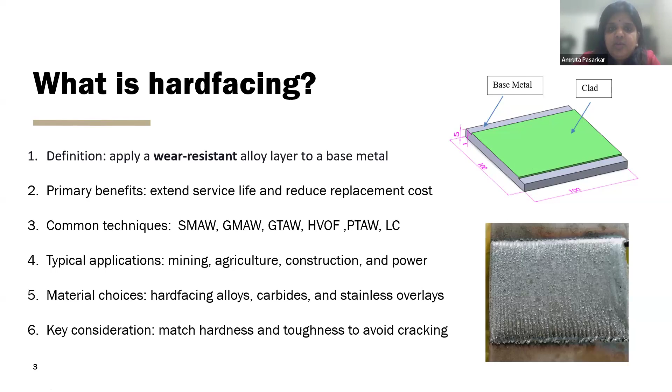Next, the material is selected according to the hardness, what hardness is required according to the application, and the toughness, what kind of toughness is required to avoid cracking, because this particular cladding material is very hard as compared to the base metal. So there should not be any cracking during the hard facing or during its operation.

The need for hard facing. It avoids wear and corrosion on the base metal, it increases the surface hardness, it prevents material degradation in high friction and corrosive environments, and obviously this will extend the component's service life.

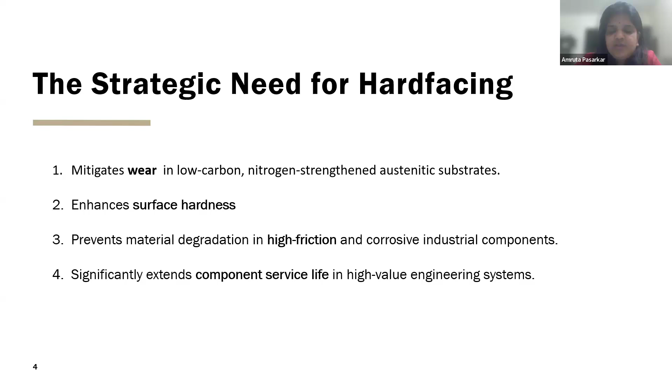Now, more about the 316LN stainless steel base metal, which is being discussed in this presentation. 316LN stainless steel is basically low carbon. L is for low carbon and N is for nitrogen enhanced. So it has some amount of nitrogen and low carbon. Low carbon is below 0.03%, and that prevents sensitization. The enhancement of nitrogen gives more yield strength compared to the standard 316L grades.

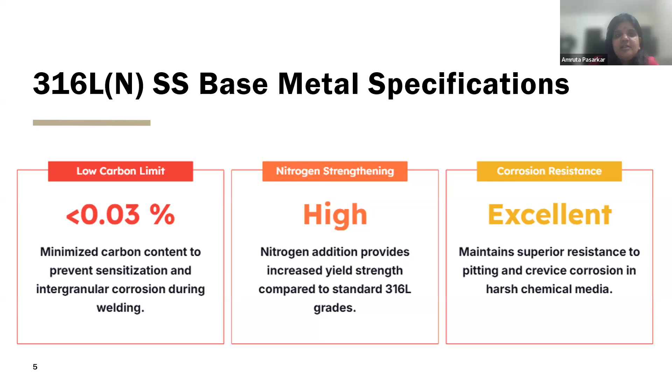And this particular material has excellent resistance to corrosion and excellent resistance to pitting. So this material is used in environments which have very aggressive temperatures or aggressive conditions, because it has a very high hardness and a very high tensile strength, so it can maintain its hardness at elevated temperatures also.

Now, how is the cladding done on the base metal? How do we select what material needs to be used for the cladding? First is the coefficient of thermal expansion. What is the coefficient of thermal expansion of the cladding and the base metal?

That needs to be checked, because if there is a lot of difference between the thermal expansion coefficients of the cladding and the base metal, it will cause stresses at the interface of the cladding and the base metal, and it will lead to cracking. So matching the coefficient of thermal expansion of both materials is very important to reduce the stresses at the interface.

Then the metallurgical bond. There should be a very good metallurgical bond between the powder and the base metal. Because if there is no fusion between the two, it is obviously going to crack or break. Then the wear resistance. Selection is based on the specific abrasion and galling mechanism in the application.

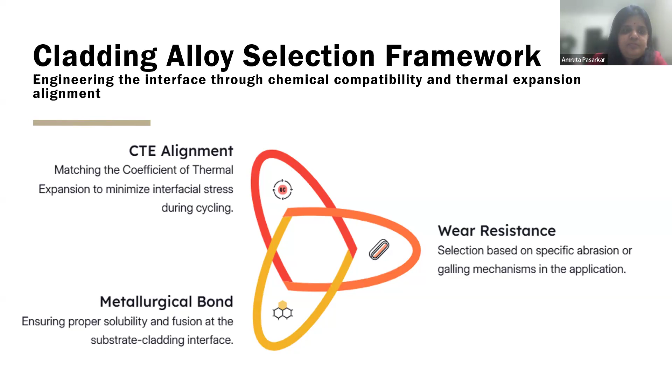There are many types of alloys that can be used, but mostly cobalt-based alloys and nickel-based alloys are used as the cladding material. Cobalt-based alloys such as Stellite 6 and Stellite 21 can be used. I am talking specifically about 316LN stainless steel base metal. If the base metal is something different, the coating can be done with other materials also.

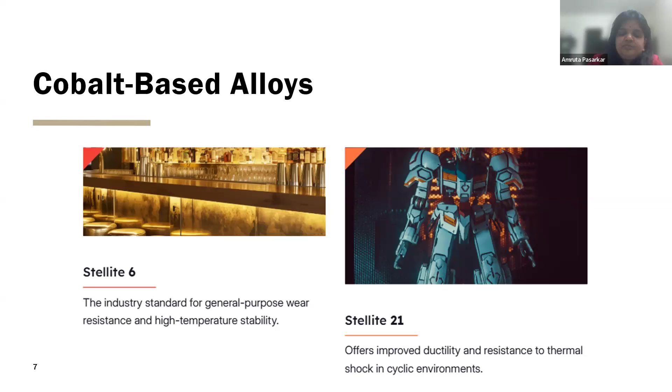So this is about the cobalt-based alloys. There are two alloys that can be used, Stellite 6 and Stellite 21. These are used for general purpose wear resistance and high temperature stability. This also improves ductility and resistance to thermal shock in cyclic environments.

Now, nickel-based alloys. Basically, cobalt-based alloys are prone to radiation. So nickel-based alloys are used as they are radiation stable, and they avoid cobalt-induced radiation activation in nuclear plants. Also, nickel-based alloys have very high hardness, and they can maintain it at elevated temperatures, as in nuclear reactors, around 500 to 700 degrees Celsius.

So we can use nickel-based alloys for superior oxidation and corrosion resistance also. Basically, nickel-based alloys are used wherever there are very high temperatures, as they can maintain their high hardness at elevated temperatures.

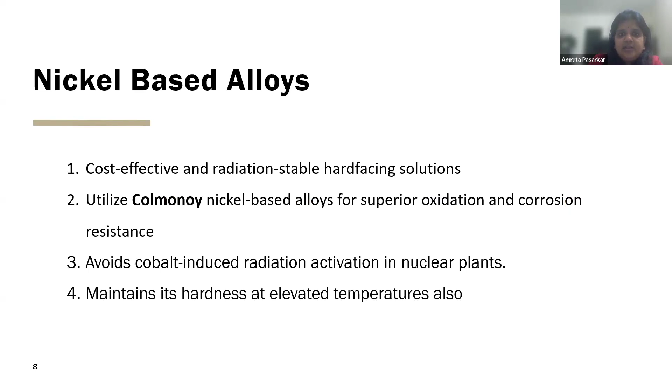Hard-facing deposition cycle. Now, how is this hard-facing basically done? So first is the surface preparation, like the cleaning and degreasing of the 316LN substrate, to make sure that there are no contaminants or debris and the surface is very clean. And then the preheating of that particular base metal is done, and after the preheating, the clad deposition is done by the various methods. So any method can be used as per the requirement and as per the application of the industry.

So applying the material with either laser cladding or plasma transferred arc welding or gas tungsten arc welding, and the parameters of these particular processes need to be decided so that the proper hard facing can be done on the base metal. Now, after the cladding is done, the controlled cooling of the particular component is done. And after the cooling is done, the component, or the cladding layer, is machined to get a plain and normal surface.

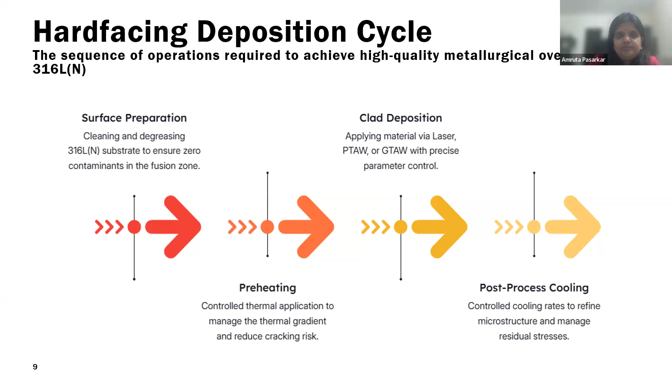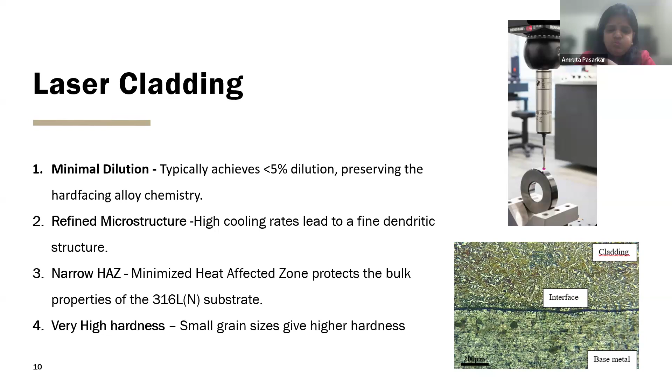Next are the different arc welding processes, that is the plasma transferred arc welding and gas tungsten arc welding. So these are the two major arc welding processes. Now, plasma transferred arc welding gives better dilution control as compared to the gas tungsten arc welding. I will also be discussing the comparison of these processes later on. I'm just discussing the brief points about these processes. Then is the gas tungsten arc welding, which has a lower equipment cost, and it can be used for manual surfacing also.

Now here we can see the image of the gas tungsten arc welding. So here we can see the thickness of this particular interface is a little higher as compared to the laser cladding. But the gas tungsten arc welding process is easier as compared to the other processes, and the equipment cost is also lower.

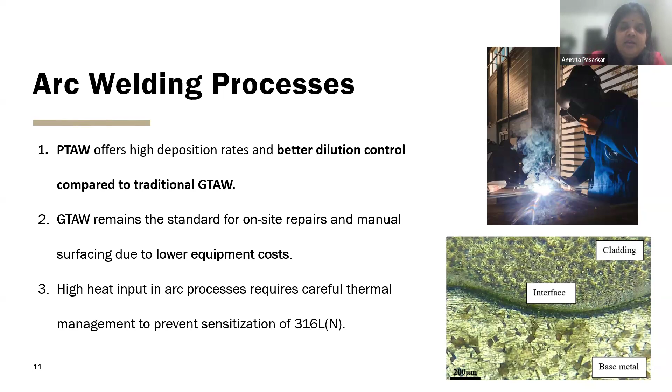The comparison of these three processes, that is the gas tungsten, plasma transferred, and the laser cladding, is that the heat input required for the gas tungsten arc welding is much higher as compared to the other two processes. The dilution is much higher for the gas tungsten arc welding process as compared to the other two processes. And the shear strength of the laser cladding is very much higher than the other two processes.

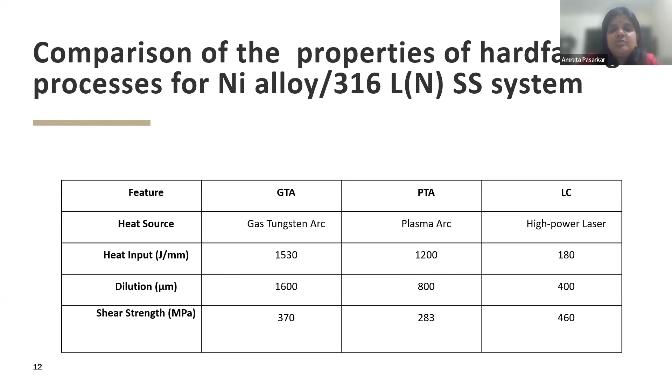So from this particular table, we can see that there is different heat input, different dilution, and different shear strength for all three processes. So depending upon the application, depending upon the cost, and depending upon what kind of hard facing or what material we are using, we can choose any of the processes.

Then what about the fatigue loads? What is the importance of fatigue loads on this 316LN stainless steel? So basically, when the hard facing is done, the two materials are different. The cladding and the base metal are different. So because of the continuous expansion and contraction at the interface, the fatigue loads and the tensile loads act at the interface. Then the mechanical vibration induces cyclic loading, potentially leading to crack initiation at the fusion line.

Also in fluid systems or high pressure fluid systems, wherever the liquid pressure is very high, the fatigue loads are acting on such hard-facing components, and due to these fatigue loads, the cladding layer can break, or it can break at the interface, also due to the sudden rise in the hardness.

So what happens when we do the cladding? When we do the cladding, the hardness increases suddenly from the interface into the cladding region. So if there is a sudden rise in the hardness, then obviously the component is going to break under the fatigue or the tensile loads, and it will cause cracking or debonding of the cladding.

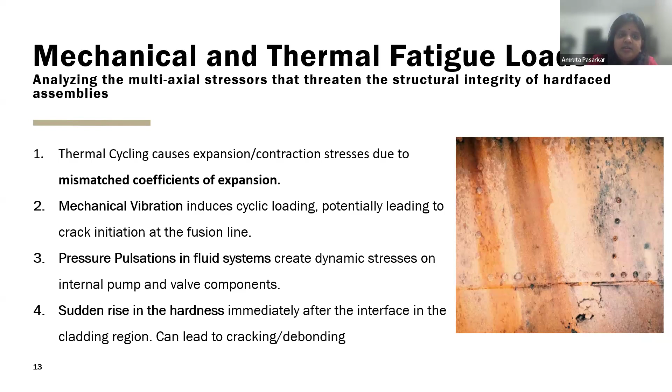Now, how this fatigue testing is done is we can simulate the thermal loading, the CTE, that is the thermal expansion coefficient. The stresses can be simulated between the alloys and the base metal. Then the fusion line analysis, the metallurgical analysis, is done by the microstructures. Microstructure analysis can be done, which I had shown previously, to understand if there are any micro cracks in the interface.

Then the cyclic testing is done using low cycle fatigue or high cycle fatigue loads as per the applications and as per the requirement. And the structural validation, like analyzing the results of the high cycle or low cycle fatigues from the SN curve, from the table format, and the review of how the bond is being created. The fractographic studies can be done after the cyclic testing to understand from where the cracking is being initiated, how the crack propagation is, and how the particular component is failing.

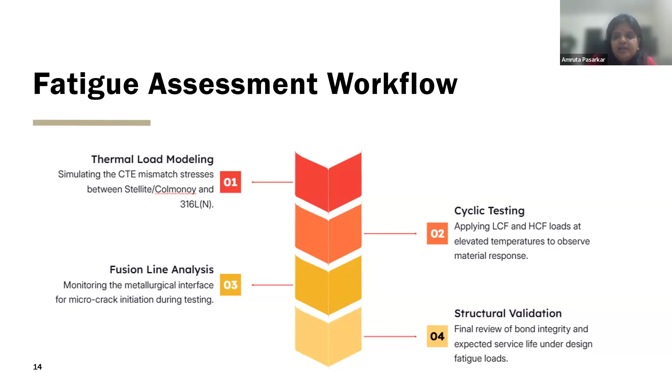So the industries where 316L and hard-faced fatigue testing can matter, I have noted down some industries, like the thermal power industries, wherein we have the turbine blades, the boiler tubes, where high temperature cyclic loads act on such components. Then aerospace and space industries, where thermal cycling is there during takeoff and cruising. Then nuclear power industries, wherein the temperature operates between 500 to 700 degrees Celsius under mechanical loads.

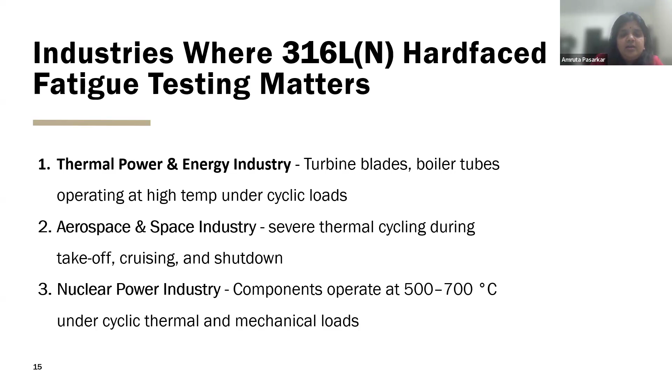So this is an example where I have shown one component which is being used in the nuclear reactor. So this is the grid plate here, which is hard-faced. Now, this whole component is situated in the nuclear reactor, surrounded by sodium liquid. And because of the higher pressure of the sodium liquid around this component, and the higher temperatures, the operating temperature of the nuclear reactor is around 500 to 700 degrees Celsius.

And because of these higher pressures of the sodium, the fatigue or tensile pressures can be created on these grid plates or the support structures inside the reactors. So this fatigue testing is very important to understand how the particular component is going to take its load at higher temperatures and pressure.

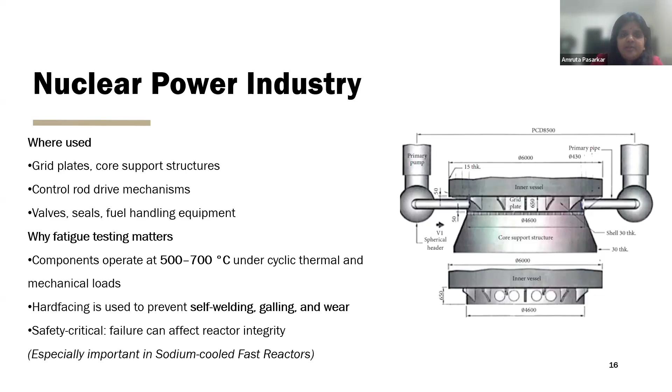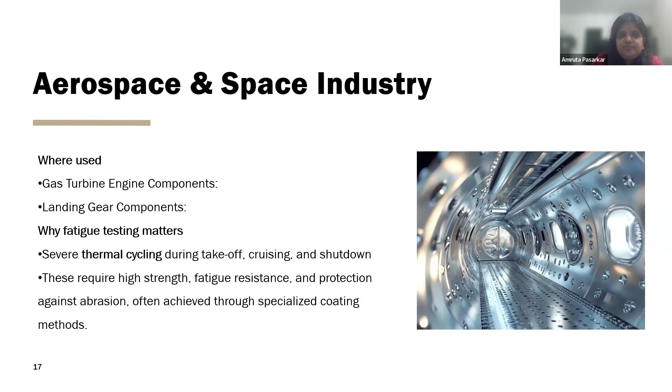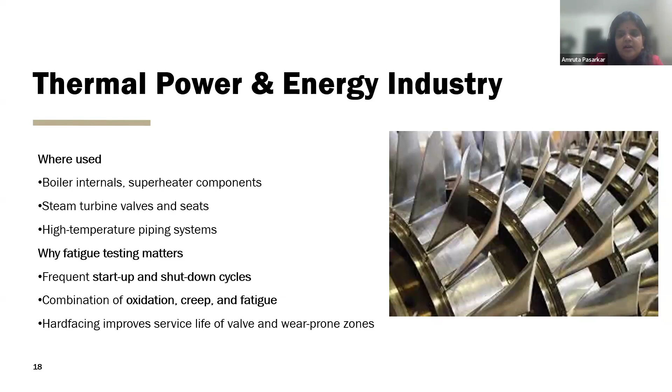Aerospace industry, so gas turbine engines, landing gear components; again, thermal cycling is there during takeoff or shutdown. And these require high strength, fatigue resistance, and protection against abrasion. And the thermal power industry, wherein there are boilers, superheater components, steam turbines, with much higher temperatures and aggressive environments inside. So these components go through very aggressive environments wherein they need to sustain the fatigue pressures and the stress pressures.

Now I would like to explain what research I have conducted till date, just in brief. So first, initially, I have taken the 316 sheets, and on that, the hard facing was done by nickel alloy, that is the Colmonoy alloy, because my specific application was for the nuclear industry, the grid plate which is used in the nuclear reactor. So that is the reason I have used the nickel alloy, and by using the plasma transferred arc welding process, gas tungsten arc process, and LC process, the hard facing was done.

Then I have prepared the tensile and the fatigue specimens, after which I have done the microstructural and hardness studies on these specimens to understand what the grain sizes are, if the proper hard facing is being done, and if there is proper fusion between the two metals.

Then the tensile and high cycle fatigue experimental tests were conducted, and then the macroscopic and fractographic analysis was done on the fractured specimens to understand how the crack nucleation was there, how the cracks propagated, and basically to understand the fatigue properties. And the comparison of all the properties was done for the three processes that were used.

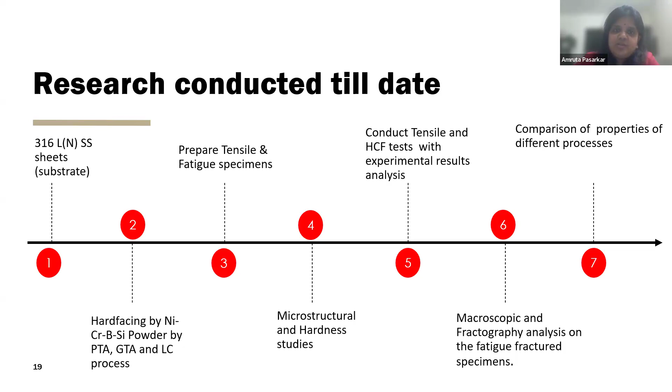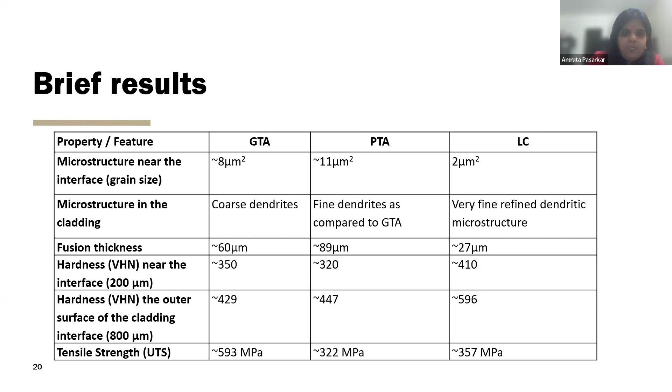Okay. Then the fatigue analysis was also done. The fatigue testing also showed that the gas tungsten arc welding process had the highest fatigue strength.

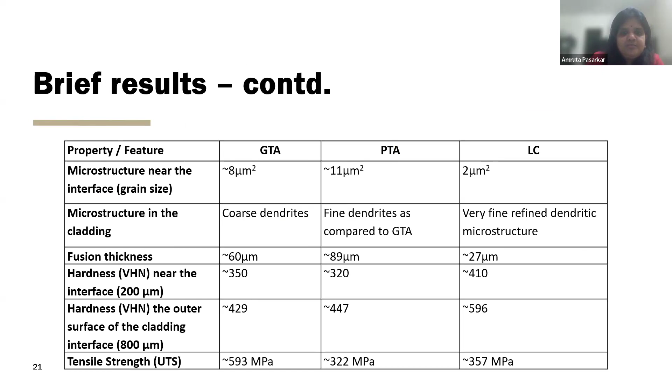So how I can contribute to the industry from whatever experience I have got till now is material failure analysis, then conducting SEM, that is the scanning electron microscope, and energy dispersive spectroscopy to do the failure analysis, and using the ASTM testing standards for the failure analysis.

Then process optimization: if any specific process needs to be used, how the optimization of the process can be done considering its various parameters like the speed, or at what temperature it needs to be done. So optimizing the process to increase the component life and to give a good hard facing over the substrate.

Then mechanical testing and design validation can be done with tensile testing, hardness testing, and analysis of all these results. The analysis can be done experimentally and also using ANSYS or MATLAB, because I have used ANSYS and MATLAB during my research work and my PhD. So I can do all these analyses using ANSYS and experimental testing, and give data-driven recommendations for design optimization.

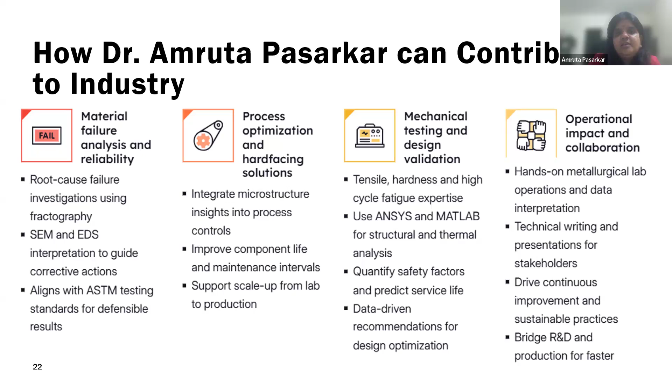Future research: as I explained previously, whatever research I have conducted, I have conducted at ambient temperatures. So I am looking forward to conducting all these tests at the higher operating temperatures of the SFR, around 500 to 700 degrees Celsius.

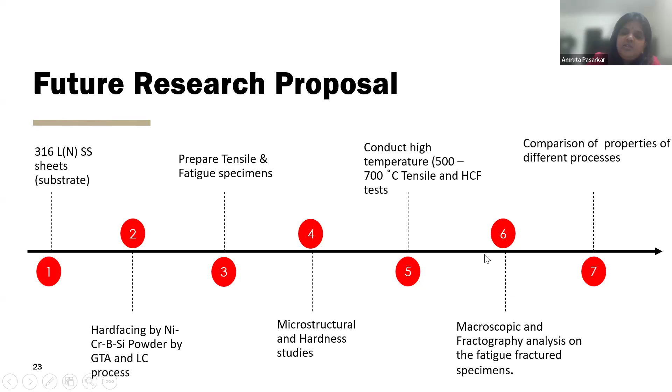So basically to take 316L stainless steel, do the hard facing with gas tungsten and laser cladding, prepare the tensile and fatigue specimens, and conduct the tensile and high cycle fatigue tests at 500 to 700 degrees Celsius, so that the actual component temperatures can be utilized for this testing, and then do the analysis on all these tests.